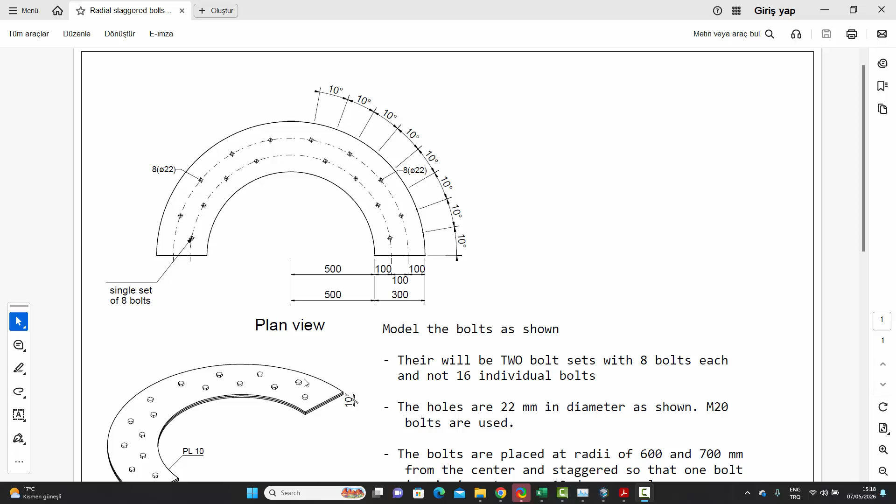So this is the assignment which we will be attempting. It's not very difficult. It's basically two 10-millimeter plates, like annular plates. If you zoom in, the inner radius is given as 500, and the outer radius is given as 500 plus 300, which is 800.

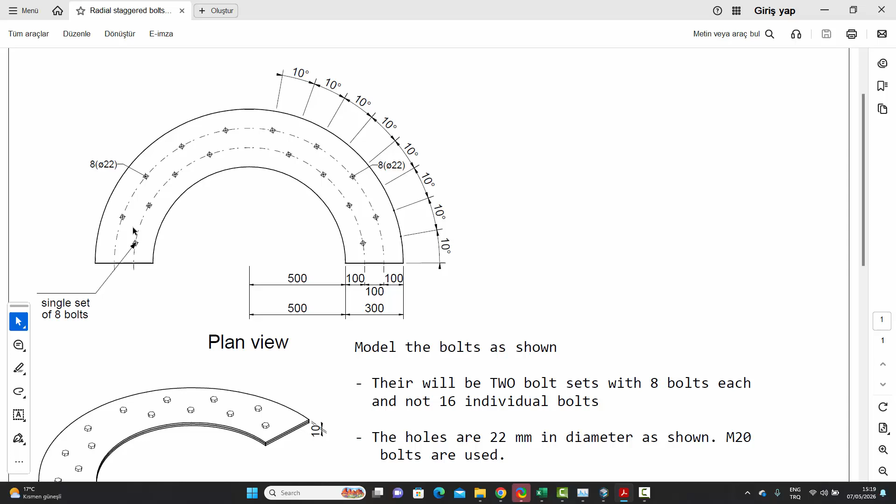And then there will be bolts like this, staggered radial bolts. There'll be two sets of bolts, so we will not create separate bolts, but this set of 8 bolts will be one ID, and this set of 8 bolts will be a single ID. So we don't want to see 16 bolts or two sets of 8 or 8 different bolts, but two sets only of 8 bolts each - one on this side and the other on the other side.

And the holes - these are M20 bolts, and the holes are 22 millimeters. The angular distance between them is 10 degrees, but they're staggered in the sense that you have this bolt over here and then this bolt is missing. Then you have this bolt over there and this bolt is missing, and it goes on like that. There's no bolt at the center, but on the other side it's symmetric.

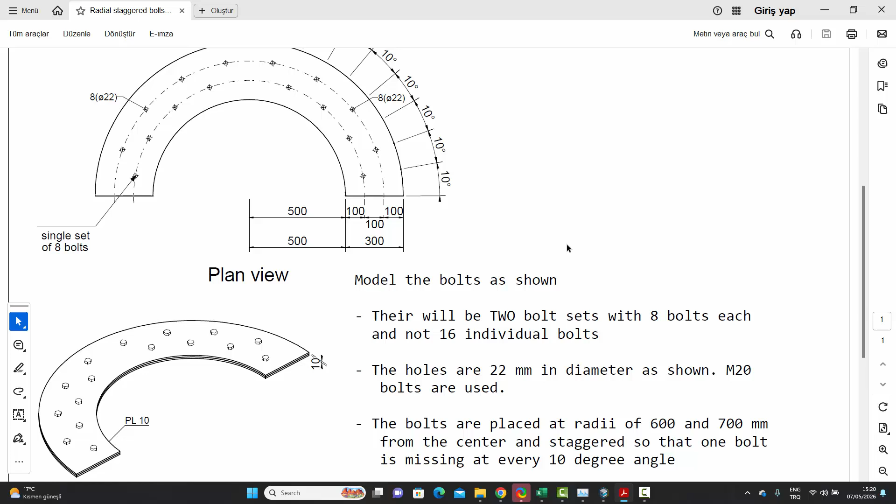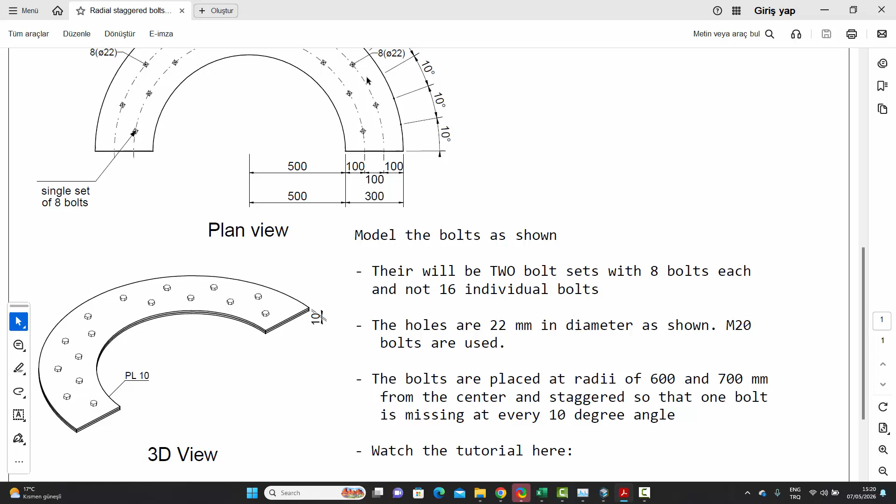The bolts are placed at radii of 600 and 700, which means the first line of bolts has a radius from the center of 500 plus 100, which is 600, and the second one has a radius of 700. And they're staggered, like I said, so there'll be one missing in each line. So let's try and create this.

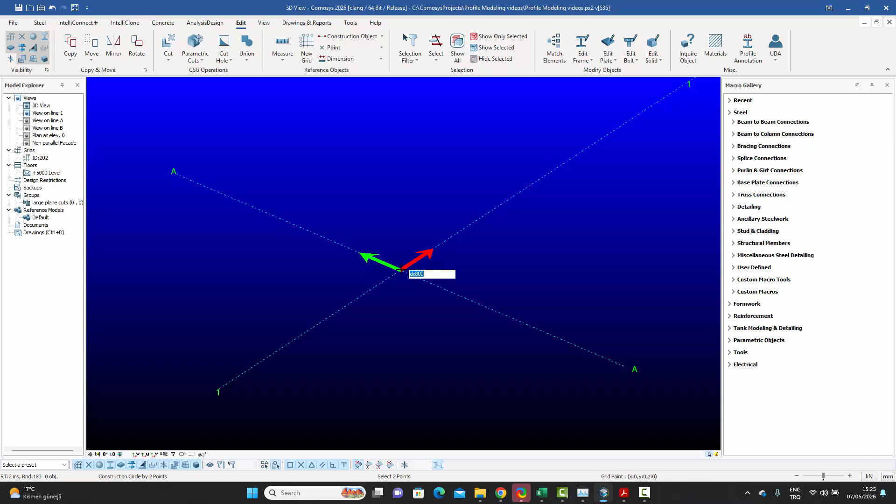Let's start off by making those two annular circles. We go to the edit command or menu and choose construction circle with center and radius. Choose the center point, hover over the same point and say dx 500 - this was the inner radius. Then once again click on the same center, hover over the same point and say dx 800 - that was the outer radius.

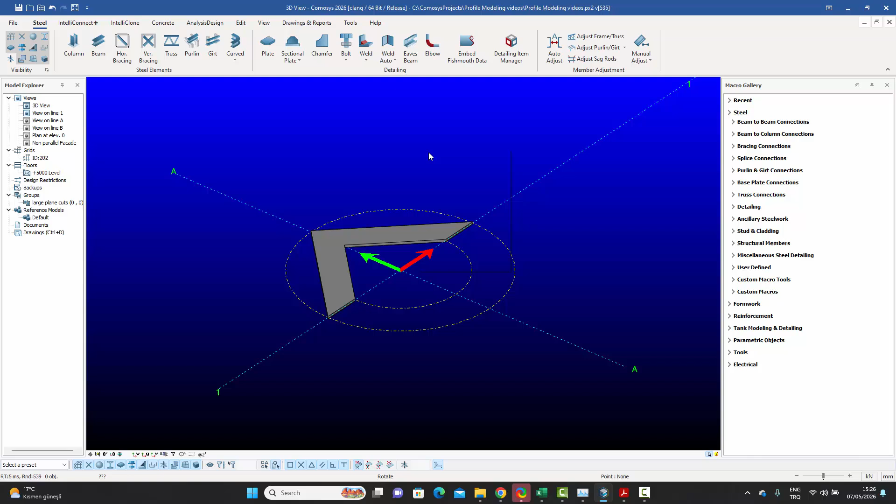Now we can quickly create the contour plate from there to there to there, to that point, to that intersection point, and then back. The thickness needed to be 10 millimeters, like that. And now we want to give this point as well as this point a chamfer of type 4, so that we get the annular ring.

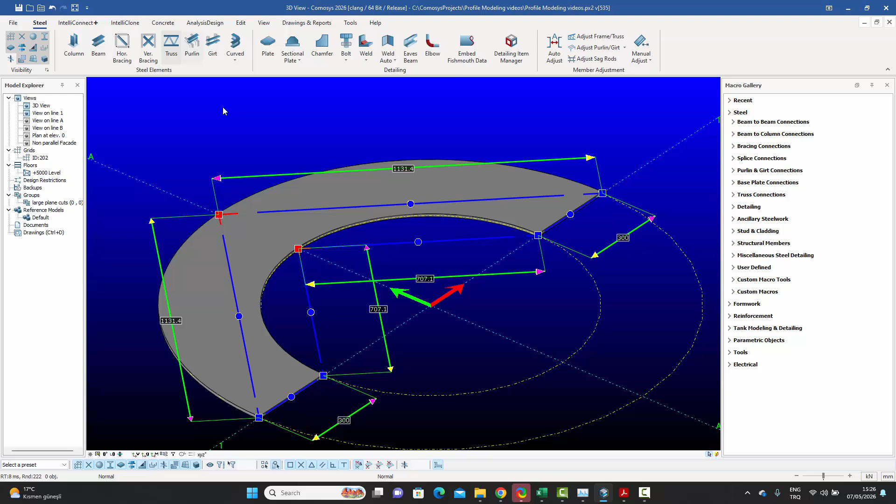Once we are okay with that, we can select this plate and say copy linear from here to here - that's 10 millimeters, like that. And we have the two plates. Let's change the color of one of them so it's more easily visible. There we go, and we have the two plates ready.

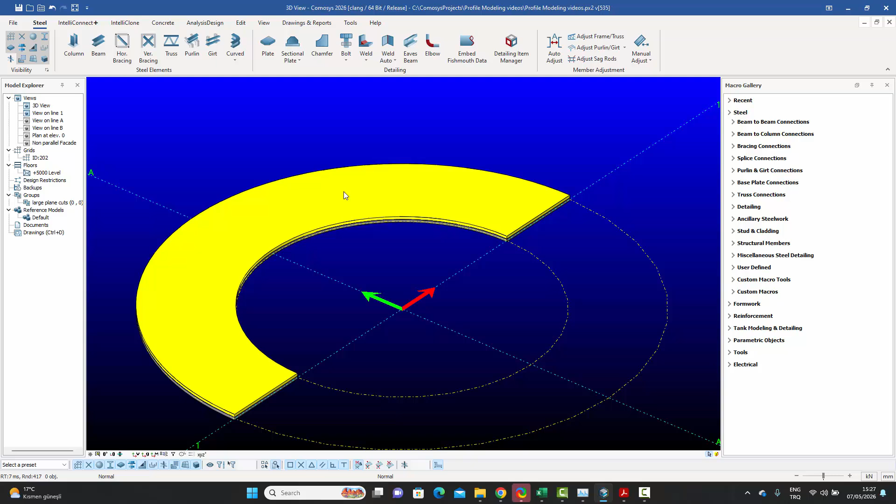But the actual assignment is about creating the bolts. Now I'm going to start with the bolts, and to do that let's go back and check. So the first set of bolts is at a 10-degree angle from that point. What I'll do is create them exactly along this line and then rotate them around the center 10 degrees, and we'll go from there.

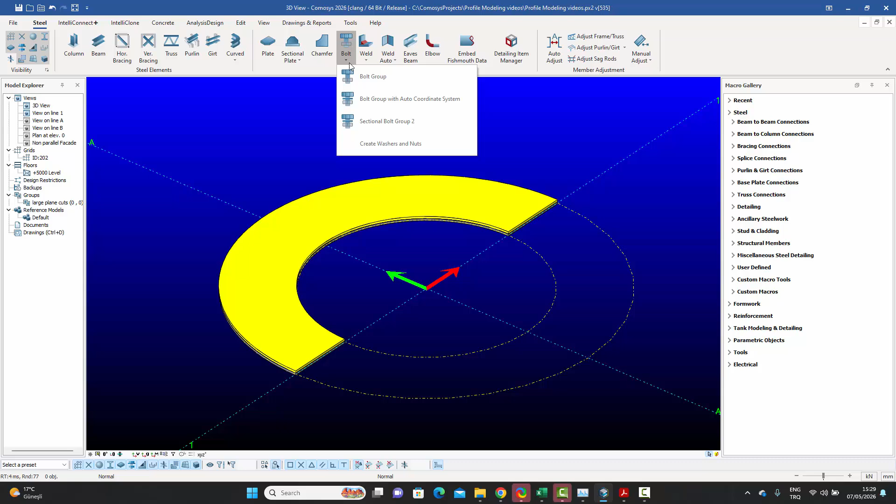To create the bolts, we go to the bolt command, bolt with auto coordinate system, because we have plates. Select the top plate, select the bottom plate, right click. Then the first point I want 100 millimeters inside, and the second bolt would be another 100 from there.

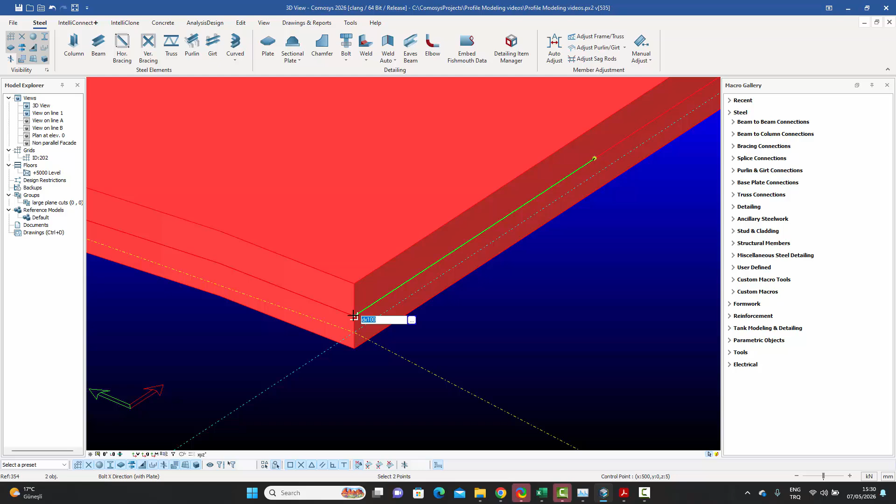So what I'll do is hover over this point and say dx 100 for the origin, and then for the point in the x direction, hover over the same point and say dx 200, like that. And when I do that, since it's right on the edge, sometimes you get this error because it just doesn't find the material exactly on the edge.

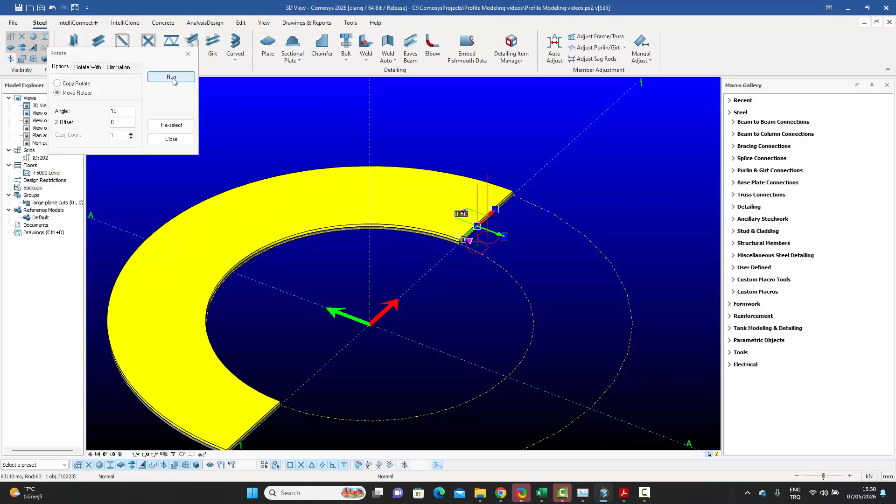So I'll just select this, right click and say move, rotate, click the middle point and right click to get the rotation axis, give it an angle of 10 degrees and say run, and immediately the bolts are created. Of course, the distance between the bolts is the default value right now, it's 60, so I'll change that to 100 since that's the requirement. By doing that, we'll get the first set of bolts over here.

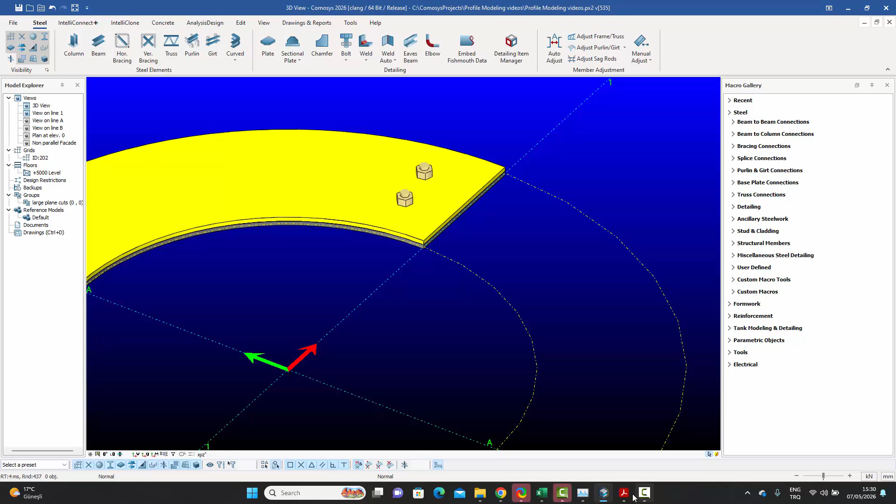Now, if we go back to the model, we see that there was one set over here. Of course, these bolts are missing. We'll try to find a solution for that later.

We got the first one in. How many copies do I need? So we need 1, 2, 3, 4, 5, 6, 7 copies of this with a 10-degree angle.

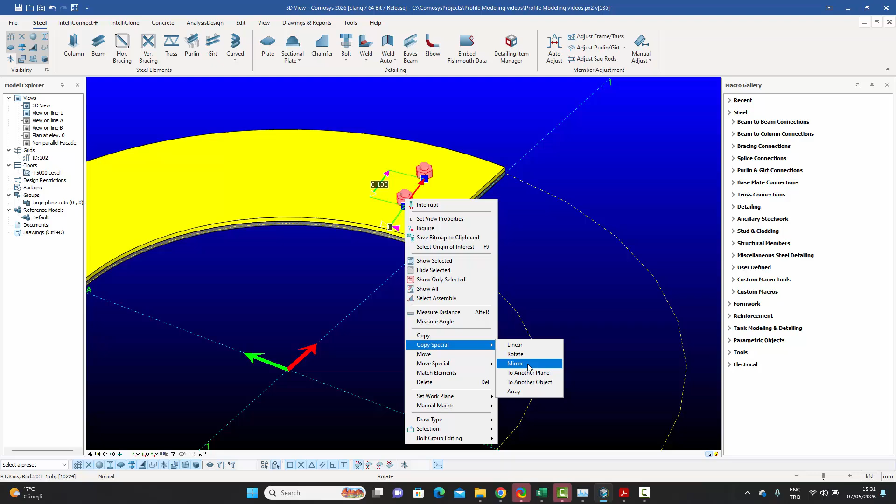So we go back to the model, select this, and say copy rotate 10 degrees, and we need 7 copies like that, and we'll get the bolts over there.

And then the last one I'll keep on rotating, but this time because it's going to go across, if you remember, this middle line is missing completely, and then we go to the other side, so it's a 20-degree jump, and then once again once we get that, it's 1, 2, 3, 4, 5, 6, 7 more copies.

So let's do the 20-degree single one at the moment, like that. So we have this one, and then we go back to the 10 degrees, and we have 7 more copies to go.

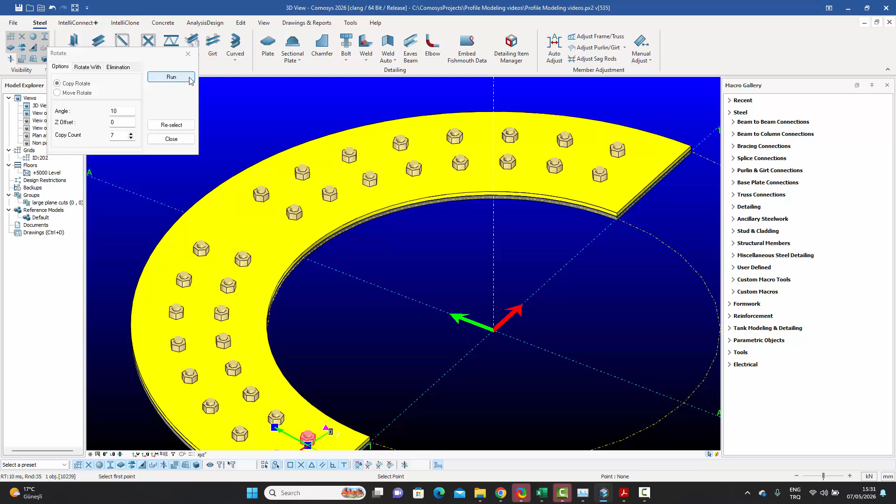Now all of these are separate bolt IDs, whereas what we want is for this whole set over here to be one ID, and we want this whole set over here to be one ID, and we also want alternating bolts to be missing from this whole thing.

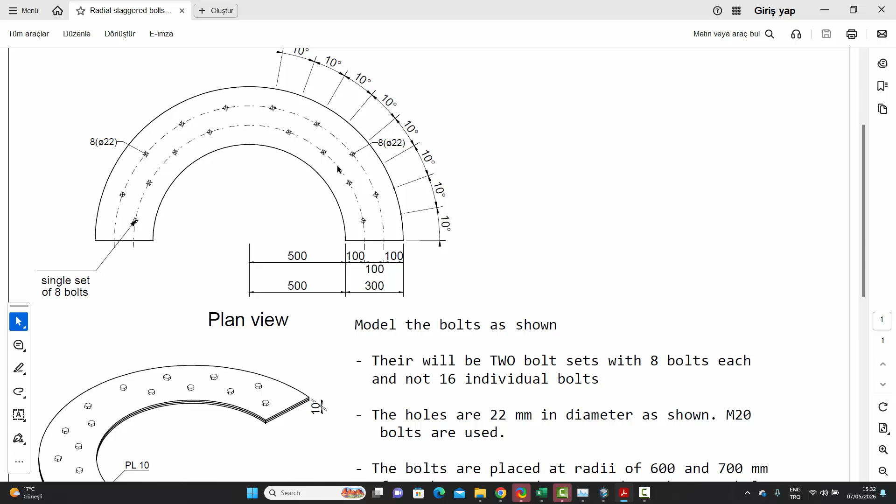So if we go back, we see that the first one is available, the second one is missing, and then the fourth one is missing, and then the sixth and the eighth one are missing like that. So we go in, so this one is okay.

So what we need to do now is, let's do one thing first, because what we want is for this whole thing to be one ID, and right now they're separate IDs. So to achieve that, what we'll do is we'll select this bolt set, right click on it, and come to the bolt group editing and say combine group.

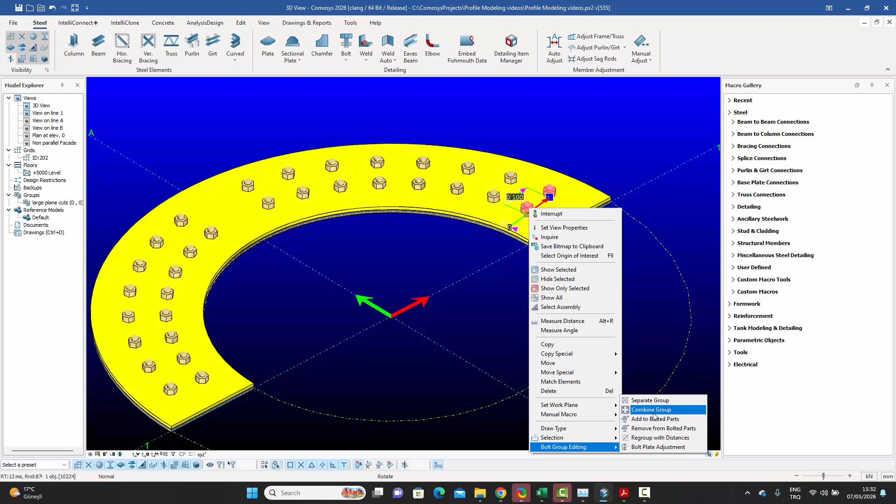Now when we get into that command, it asks for the first bolt, which will be the main bolt in this whole thing. So I'll select the same one again, and now it asks for select bolt groups to be combined.

And now I'm going to start selecting this one and this one and this one and this one and this one and this one, and then I right click. And what that will do is, if I right click again, it's going to put that whole thing into make one ID out of it.

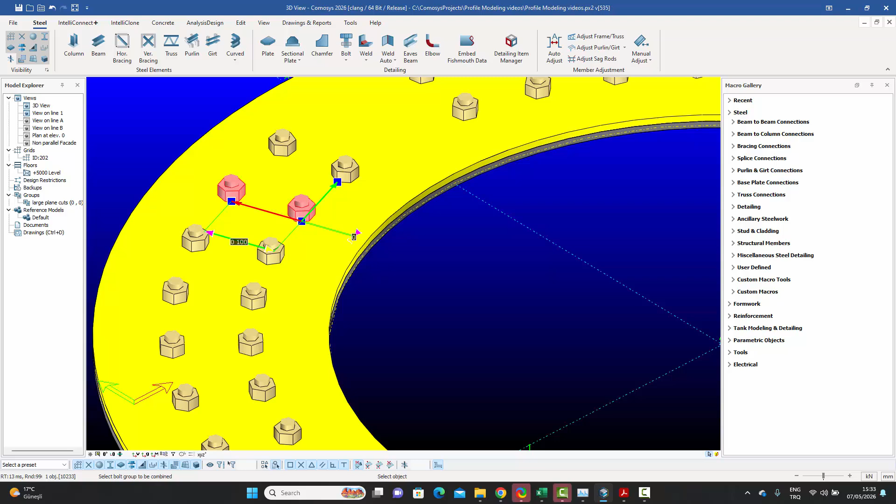I do the same thing over here, bolt group editing, combine the bolts, select the same one again, and then I click on this one and this one and this one and this one, like that, and I right click, so that now all these are part of one bolt. So we basically have two IDs, which is what we wanted.

The only thing which is missing now is that lots of these bolts are actually not there, they're staggered, and we need to now address that.

Now in COMOSYS, when you select a bolt group, all the bolts are selected, but if you keep the Alt key pressed, then you can actually select individual bolts like that.

So by keeping the Alt as well as the Control key pressed, what we can do is we can actually go in and select alternate bolts like that, and then we will select this one as well, and this one as well, and this one as well.

And after having selected those bolts, we can just click on the delete key, and those ones will be eliminated from the group. It's still one ID, but those ones have been eliminated.

Now I can do the same with this one. I can click on the Alt key and select this one. Also click on the Control key so that I can select the alternate ones like that, and then I can select this one and that one and that one and that one as well. And I can now press the delete key.

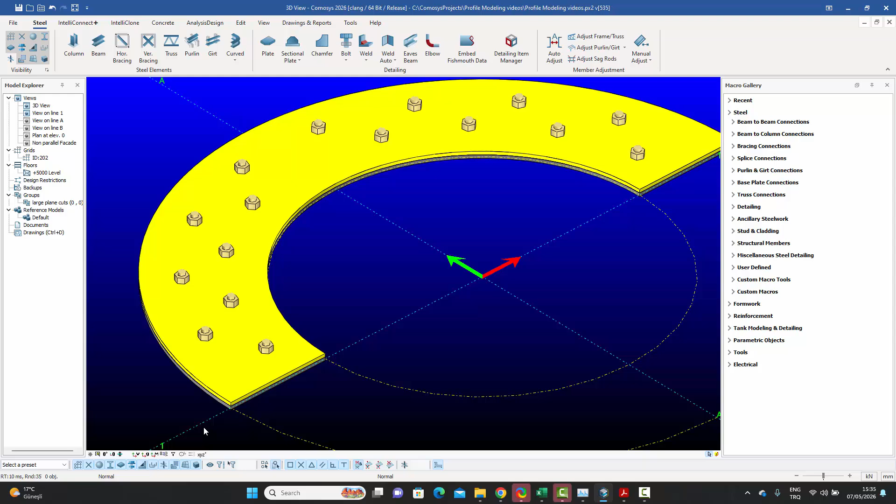And if I now look at it from the top, you can see this is exactly what the assignment was asking us to do. Two groups, one group with 8 bolts in it.

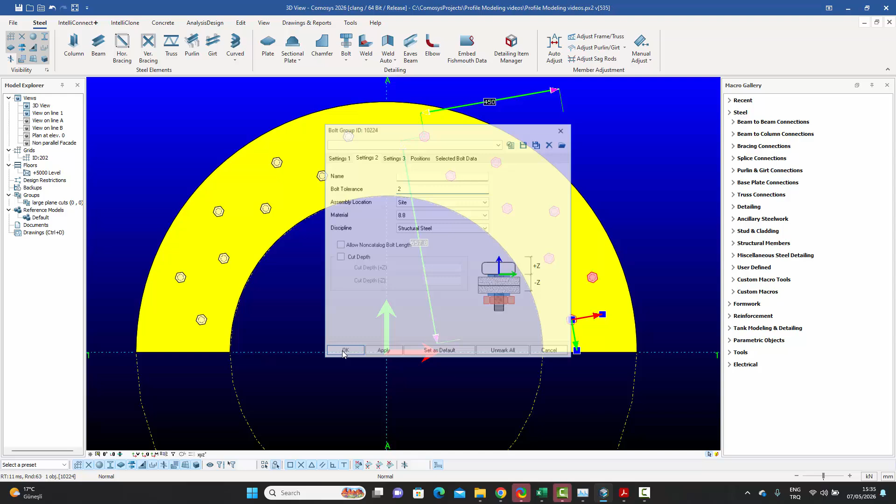If I don't recall if we changed the tolerance, it needs to be 2 millimeters. So let's do that now. This one also, the tolerance needs to be 2 millimeters because 22 bolt hole sizes were asked for.

But we've basically achieved 5, 6, 7, 8 bolts on this side, 8 bolts on this side, staggered, radially, and in one group. That was the assignment.